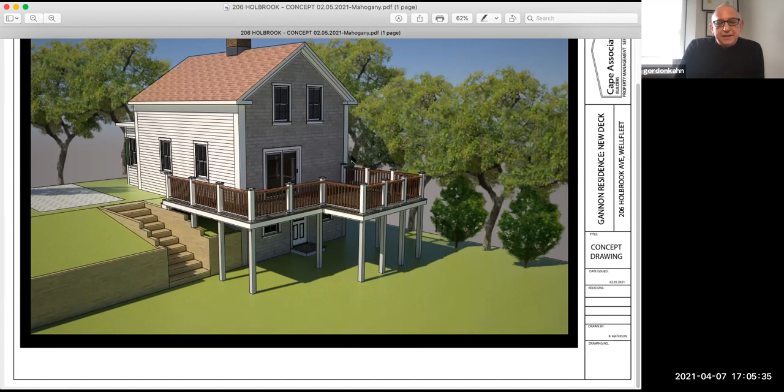And they definitely would prefer to have a screen, a sliding door as opposed to a single French door with a side light, or I think they would be open to whatever you guys would advise.

She did mention that a French door would be fine. It's just that the scale of an Andersen sliding glass door, without divided lights and without any kind of demarcation within the window itself, seems not annihilating to me, but a little jarring in the context of the whole house, which is so charming.

And only, again, it's on the back, and that's exactly what I was just going to say. No one is ever going to see it except for the Gannons and her family. But she is open to putting a unit out there if that's what you would prefer.

Well, maybe the Gannons would like to see a drawing that shows sort of what a more traditional French door would look like in that place, even if it had a single leaf and two side lights, or if it were a door flanked by a window or something kind of charming and old-fashioned, because the house has a kind of charming quirkiness to it everywhere.

It sure does, doesn't it? And it might be nice to have it not be quite so neat. Okay, so I will go back and we'll do a rendering with a French door unit, whether it's a single with side lights or a side by side.

Yeah, sometimes we've done like a French door next to a very tall double hung window. I don't want to be the design architect here, except to say that my intention would be to find something to put back there that, even though no one's going to see it except them, is quirkier and kind of less neat and less sliding-glass-doorish.

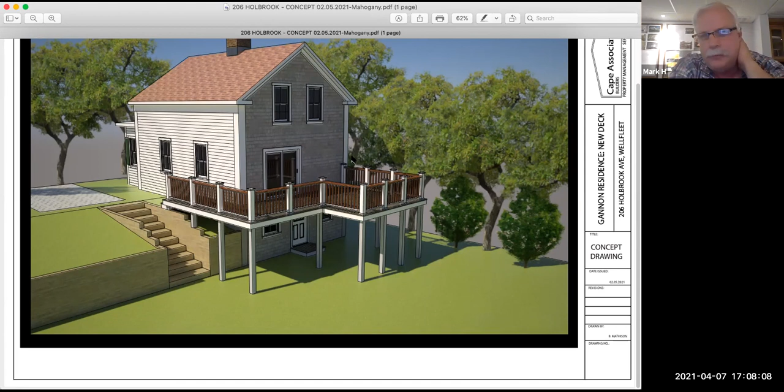Okay, so let me ask you this. The existing windows, I believe, are 2 over 2. So if we had a divided light French door or sliding door, would that be too much? Yeah, I think it's too many little light cuts because it really isn't from that era of tiny light cuts. It's really more Victorian.

And it's 2 over 1, is that what it is in the back? I can't see, hard to tell. I think the front windows on the second floor were like 6 over 1 or something like that. Is that right? Yeah, so I don't know.

Just a suggestion, maybe play around with something that's not quite so 'we're going to put a sliding glass door in here.' A combination of things would be nice.

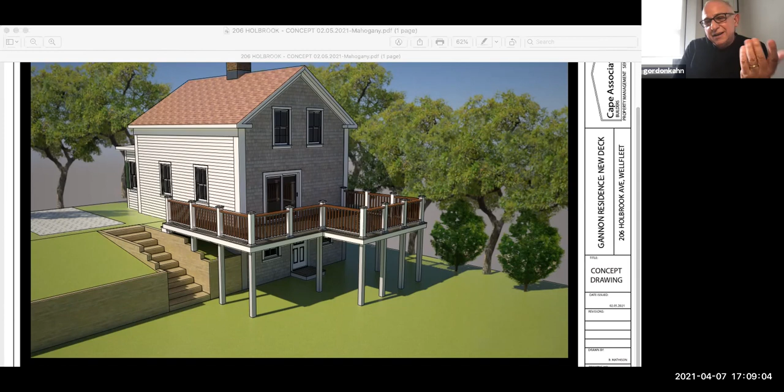You've got that great front elevation with that porch extension and those narrow, tall gang of windows across there. That really kind of sets the tone for the house, that charming quirkiness, kind of a long, lean proportion. Those things are all important to me, even though nobody's going to see it.

And I really don't mean to give anybody a hard time, I'm just suggesting that maybe we could take it a step further, put another layer into it, so it's not just putting a sliding glass door in. Not being confrontational, we're here just to hear what you guys have to say, what you think you would like to see, and then we'll go back, design, and come back.

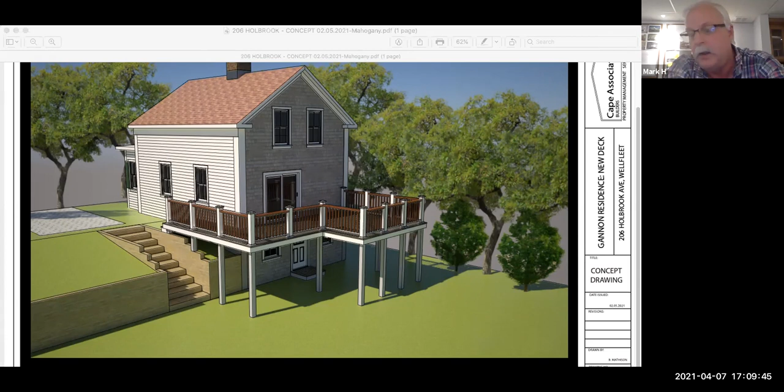Okay, great, fair enough. Thank you for the openness to suggestion. Yeah, thank you so much. Your comments on this, Mark, or any of the commissioners?

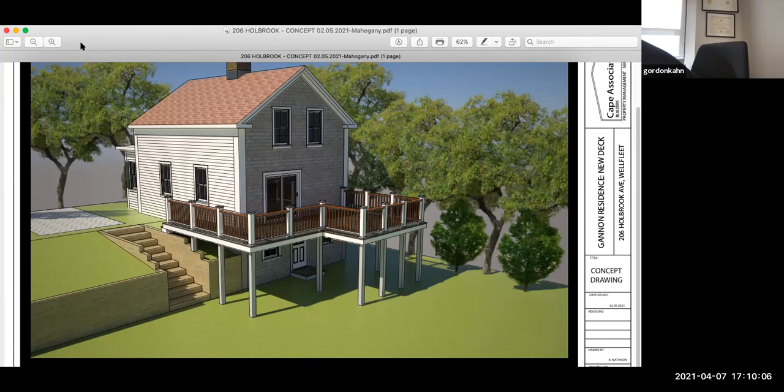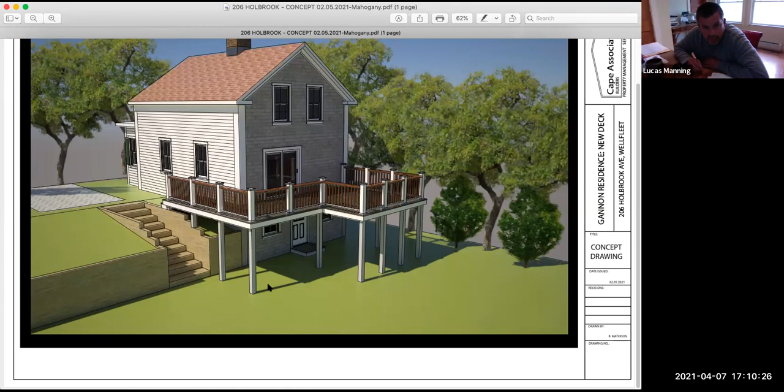Do we need Gordon though? Well, he can vote once he's back. Okay, I guess we'll wait.

All right, so the next item on the agenda is 110 Cannon Hill. And who is presenting on this? There's no one presenting for that, as far as I know, but I had it on the agenda just in case they showed up. There's somebody on the bottom of the screen who just has a telephone number, so I'm not sure who they are. They haven't identified themselves.

Can you hear me? Yep. In the top of the row there, Russell Perry, Highland Builders. Oh good, you are here. Thank you for being here. And do you have items that you would like Lydia to present for the meeting, Russell?

Do you have the pictures that I sent in? Yes, that I circled the porch area that we're going to be presenting the work on? What we're presenting to do is remove all the storm panel windows in this porch area right now, and we're proposing to remove those and put Andersen sliding or gliding windows in.

I apologize for having to excuse myself.

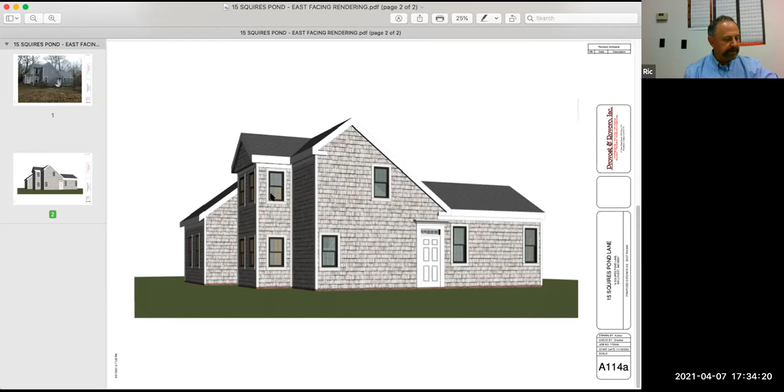If you don't mind, Lydia, perhaps we'll go to the next picture, which would be a southerly elevation. Southerly - I have an east-facing rendering next. Yeah, we can go right to the east facing, that's fine.

And basically what we're doing there is to show you the pictures as it stands right now, and then our renderings as to what we're proposing.

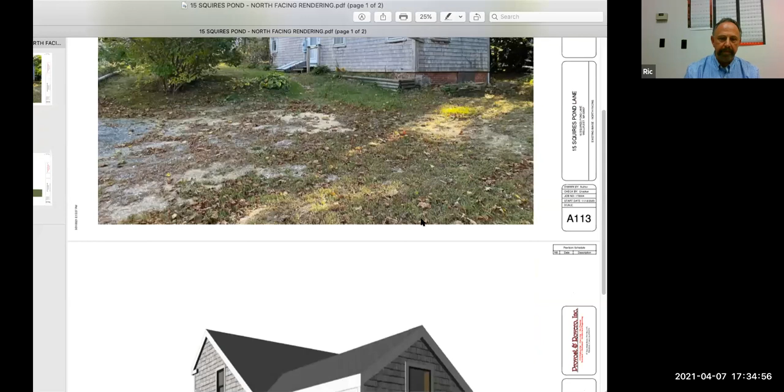That's as it looks now. That skirt on the bottom, that brick skirt that we thought might be a foundation, actually was set on timbers with decking over the top of it in the sand, and that brick had to be added in just as a skirting material. Our proposal would be to use that same brick on a concrete foundation, to achieve the same look. It'll have a different function, but our proposal is to have that look the same.

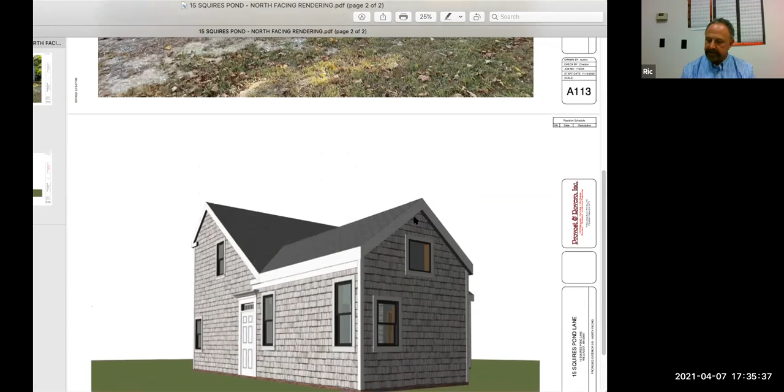And we've noted on item 3, the second half of that - bullets 4, 5, 6, and 7 are: replicate the window locations period in affluent style, replicate the eave rake and cornice trim details, replicate the flat trim window details and corner trim, and replicate the cedar shingle wall siding and asphalt roofing as shown in the pictures.

Certainly, if one was to go back and take a look at the assessor's picture, that did show that window. It also showed a multitude of different color siding and a roof that about a third of the shingles were missing on, hence what we found as far as degradation was concerned in the framing and structure of the building itself.

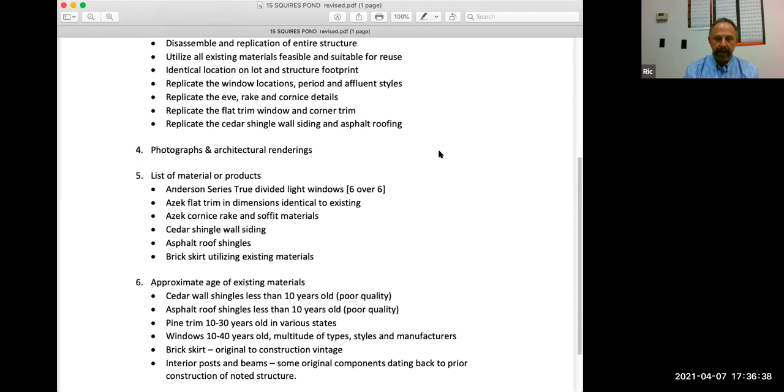Again, our presentation was photographs and architectural renderings, and then the list of materials would be an Anderson Series 400 Woodwright true divided light windows that have the applied moldings, the grills between and the applied moldings in wood.

6/6 is what we're proposing because we felt that was more in keeping with the affluence of this structure when it was put together. There's not, as you can see in the pictures, one matching window in that building now - they're all various manufacturers and all within the last, I'd say 30 or so years. But I'm certainly open on that.

We're going to use an Azek rather flat trim, and the dimensions identical to the existing. We're going to emulate the Azek cornice, rake, and soffit materials, more in keeping with it, because right now none of it's the same, more in keeping with the salt box structure than the other adders. I'd like to follow a uniformity standard and use that throughout.

I really think that the eave and rake detail with a little rake extension and eave extension not only preserves the siding a bit better, but it's what you see in that last picture and more in keeping, I think, with the period and what that salt box structure was.

We replaced the cedar shingle wall siding, asphalt roof shingles, and the brick skirt, utilizing the materials that are on site. The approximate ages of the materials, as we're talking about the exterior look - cedar wall shingles are less than 10 years old. I think they're pine shingles, grade D or better.

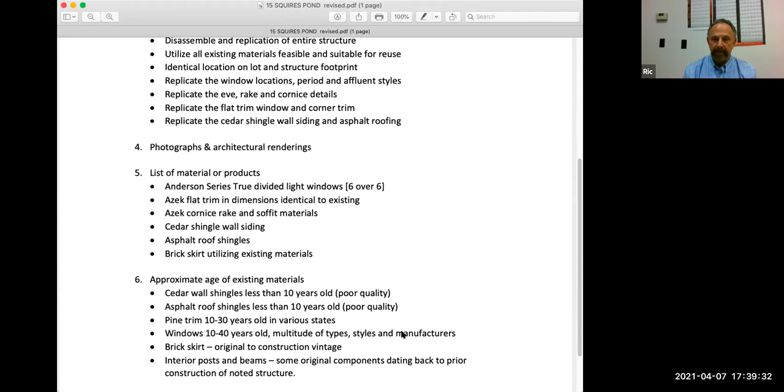And then the interior post and beam, those components date back prior to the construction of the noted structure because they did in fact have a prior life, and it wasn't the same life, because the mortise and tenons, notches, and pegs do not line up with what they have here. Some of it looked like it might even come out of boats, but I'm not a historic architect, so somebody else may be able to add to that better.

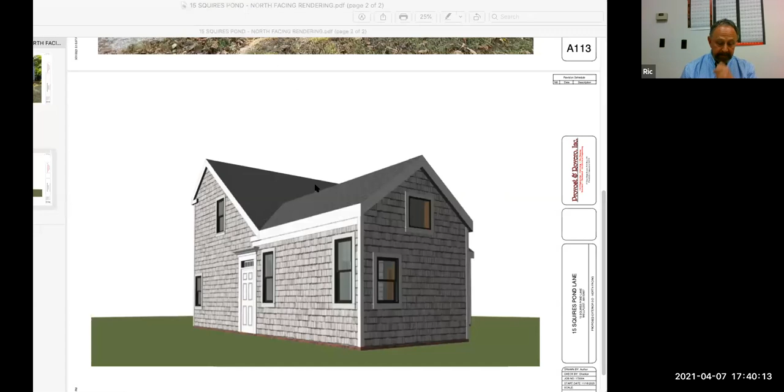So what I'd like to concentrate on now, guys, is what your thoughts are on our exterior proposals, features, and appearances. I'd love to get your input on that. Then I'd like to talk about the demo delay bylaws and go through your authority that may allow us to proceed as presented, disassembling and replicating the whole structure. But let's stay with the architectural, the exterior pieces for now.

We can talk about windows. We can talk about the door. I think we can talk about trim, although we're planning to essentially emulate everything that's there now. So, Gordon, let's just maybe talk a little bit theoretically first.

Sure. Replicating the massing of the existing structure sounds terrific to me. Same footprint, same square footage, same location, same everything. And getting the windows basically where they are, you don't have to justify that other window in there, it's fine to put that window back. In a composition like this, it's not impactful in a negative way.

I guess one of the things I worry about with this sort of thing, and I've seen it happen in town over and over again and in other places too, is the subtlety of the proportion of the trim, and making it look too new and too nice. I'm trying to get to a point, and I don't want to name any specific buildings in town that this has happened to, but they kind of get too fixed up and lose all patina, and the trim isn't quite right, and everybody's got a black muntin bar these days.